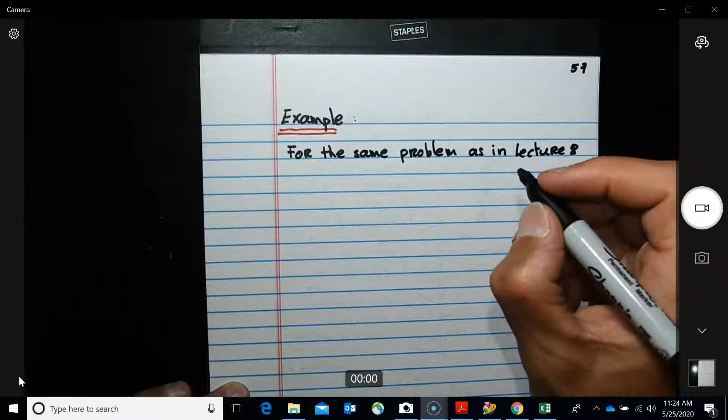So let's say for the same problem as in lecture 8, but assume the web/panel is only effective in shear.

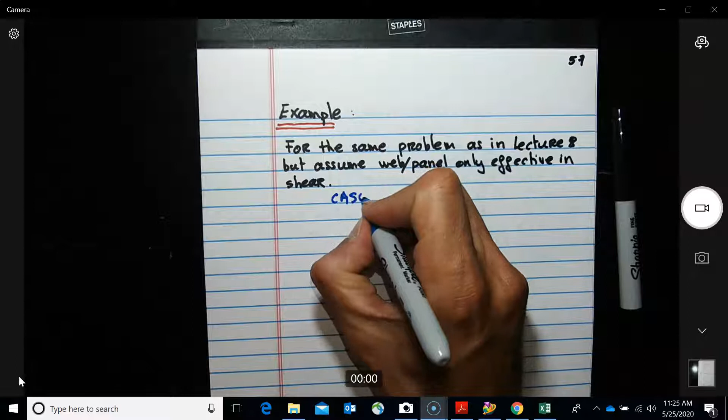Okay, so in this case we are dealing with case 1. Let me just do a very quick figure again.

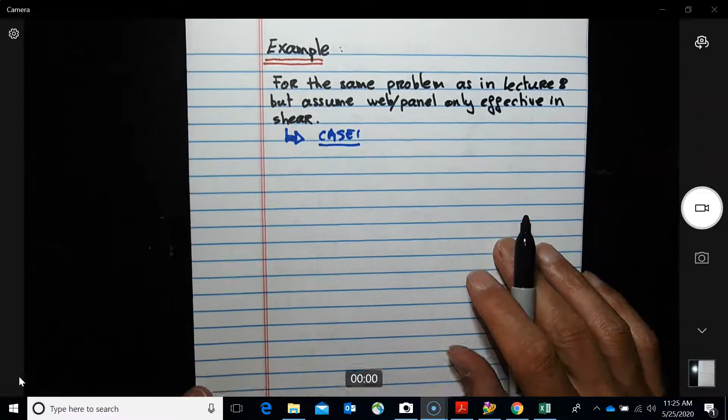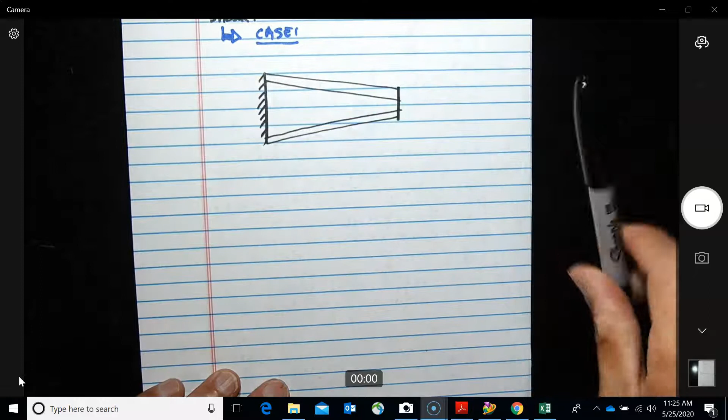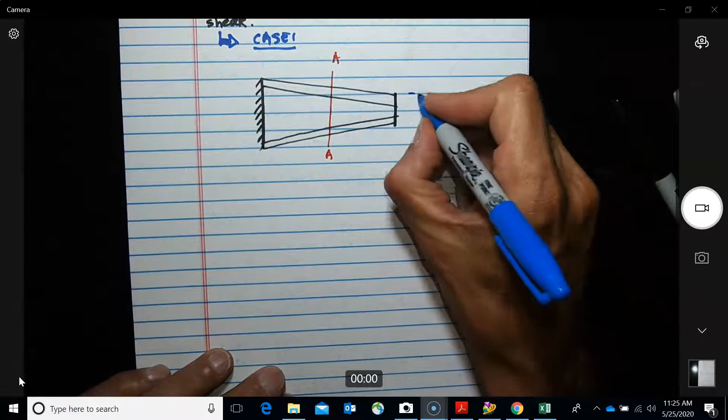So it's not too good, but let's say this was clamped. We're looking at the cut, which was right in the middle. That distance over here is 200 millimeters. This one over here is 400. And then this cut here was at 1000, and the overall length is

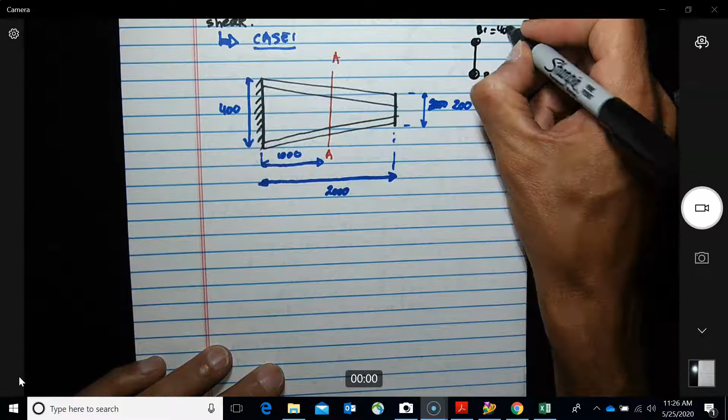2000 millimeters. Okay, now the areas of this, we had to do a boom, B1, B2, this was equal to 400 millimeters square, and the thickness here of the panel was equal to 2 millimeters.

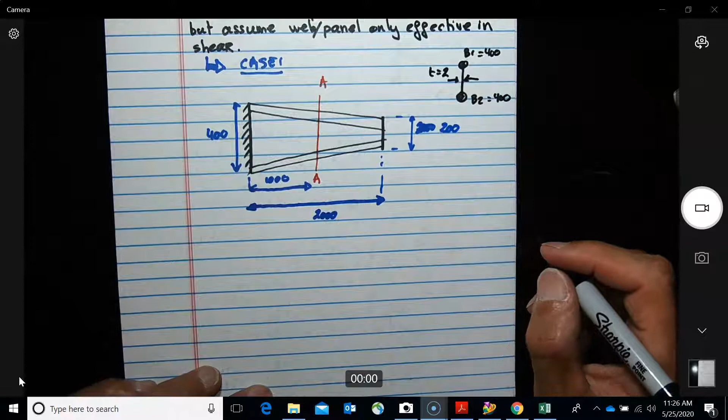Okay, all right, so basically what happens at the cut? Oh, I forgot to draw the force, and here we had a force of F equal 20 kilonewtons.

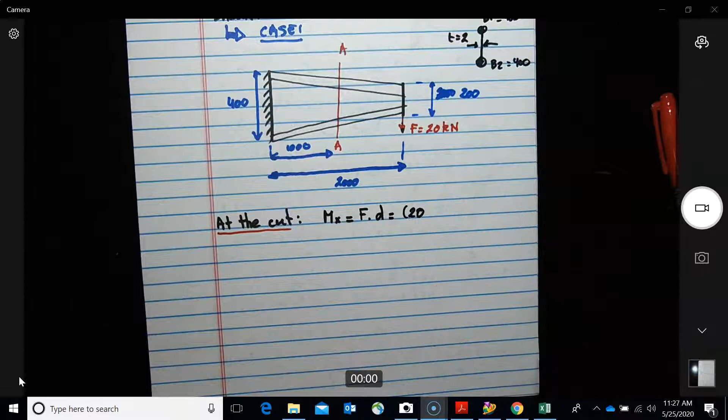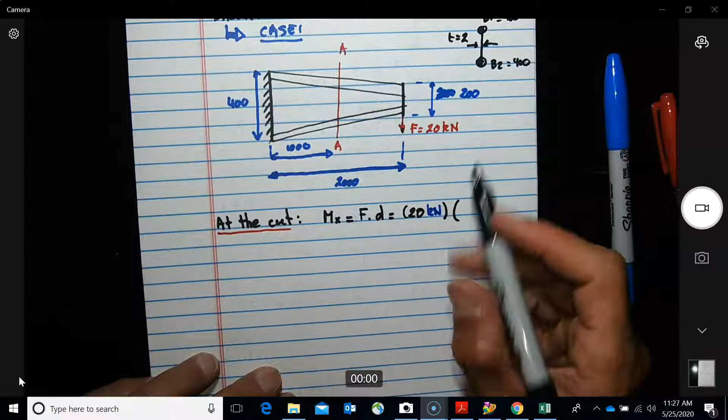Okay, so what would be the moment at the cut? So the moment at the cut, Mx, because of a reference frame, will be equal to what? Will be equal to the 20 kilonewtons times distance. So it will be 20 kilonewtons times that distance, that will be 1000 millimeters. This is going to give us that Mx will be equal to 20 times 10 to the 6 newton millimeters.

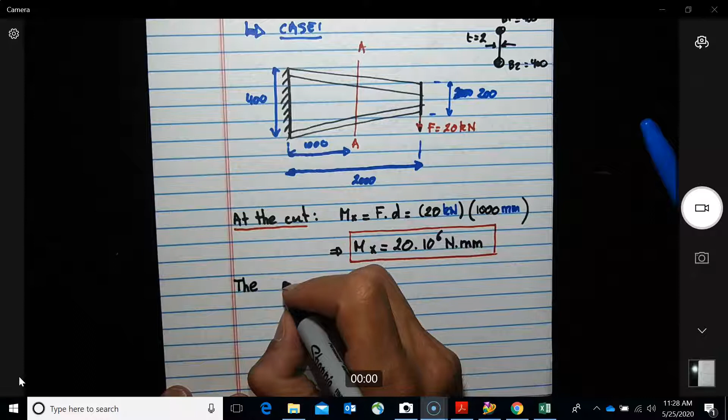All right. So by doing this, we know that the load, so we have that's 1, that's 2, so the load the flanges

is what? So remember, we're going to have two components. One would be the, we can do a little sketch for the top one. P1 will have one component, the Pz1 and the Py1.

So if we go to the notes, we know that Pz1 will just be equal to the moment divided by the depth at this location - this is 400, this is 200, the middle would be 300. So this will give us 20 times 10 to the 6 divided by 300, and then the one at the bottom will be Pz2 equal Mx over h equal to 20 times 10 to the 6 divided by 300.

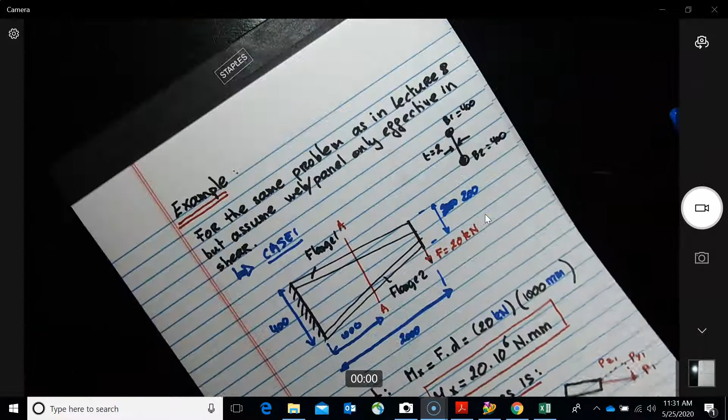All right. So now we need to find the vertical component of the load.

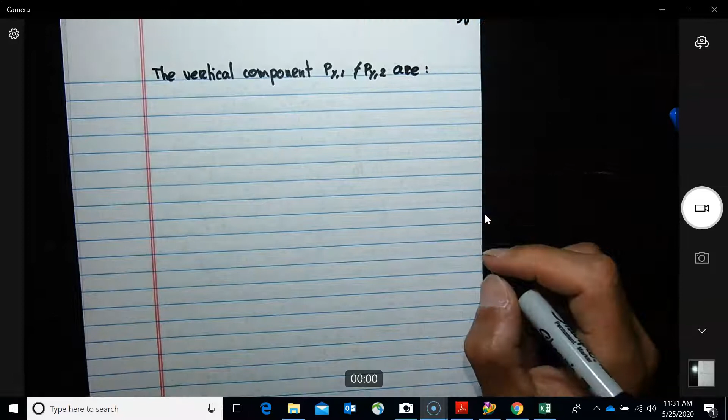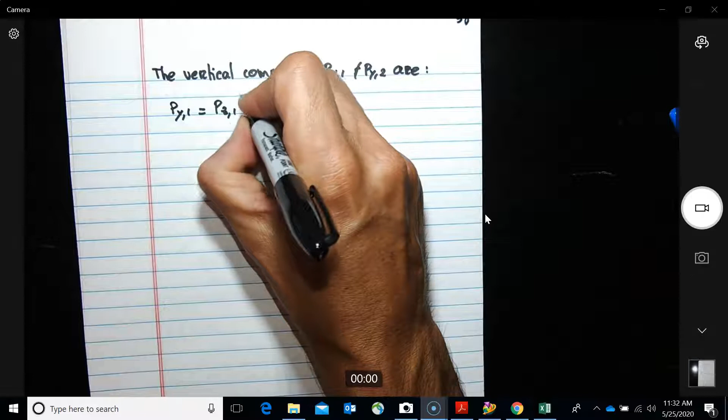Okay, so the vertical components Py1 and Py2 will be equal to what? So we'll have Py1 will be equal to Pz1 by definition tangent alpha 1, which we know it will be equal to Pz1 delta y1 over delta z. And Py2 will be equal to Pz2 tangent alpha 2, which will be Pz2 delta y2 over delta z.

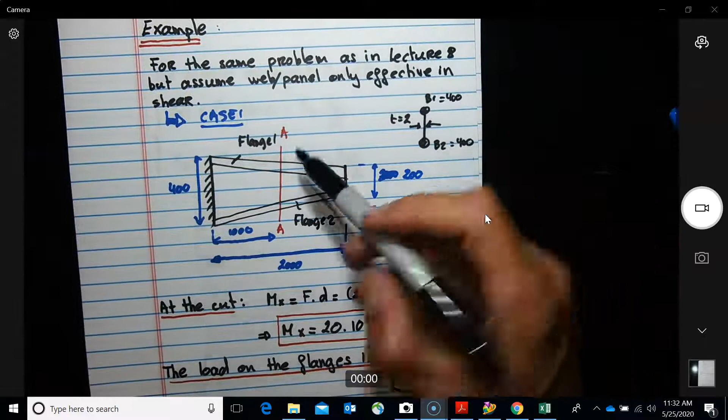Okay, you can look at the previous lecture, but basically what would be delta y? Delta y is the change in height. So between this point, let's say 400 to this one will be 300, will be 100. Or you want to look at it, this will be 200. So it will be 400 minus 300. So yeah, the overall change in length will be 400 minus 200, will be 200, sorry, half of it.

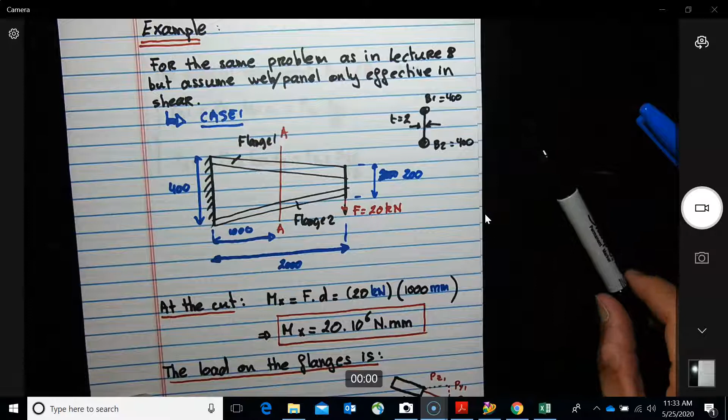Oh okay, no, I'm getting confused because I'm going - you can either do from here to here or from here to here. So if you go, let me go back to the notes, it would be easier. This I think is open here. Yeah, so this is the example.

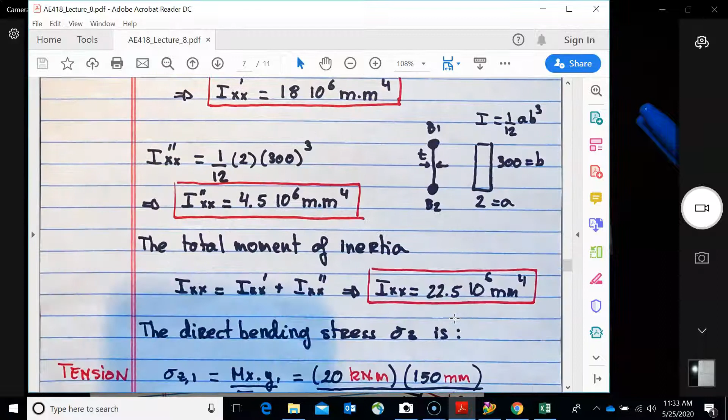So that's the difference. We did all these calculations, and then to find, let's say here, you can either go from here to here, that will be 200 minus 100 is change in height of 100, and you go from this point to this point, so it's divided by 2000. Or you can go from the change in height, let's say from here to here, or from here to here would be 200 minus 150, 50, or 150 minus 100 divided by that distance, or just that distance, which is 1000. And since it is symmetric, this one is the same, so it's 1 over 20. That way I don't have to repeat it over here.

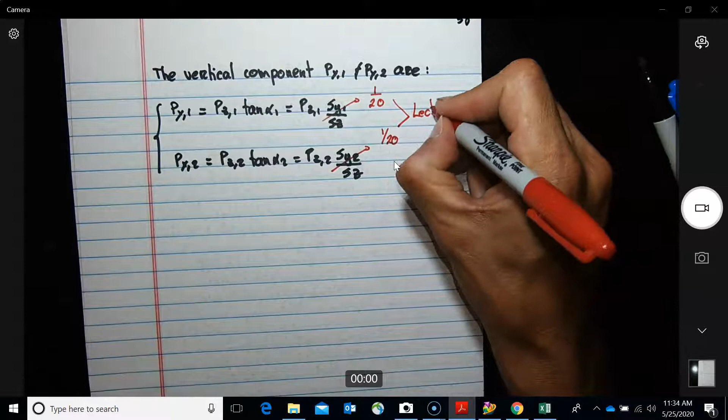So this one over here, we know this is 1 over 20, from lecture 8. All right, so now we can just go and simplify, and we're gonna get that Py1 equal to 66,666.67 times 1 over 20, and this gives 3,333.33 newtons.

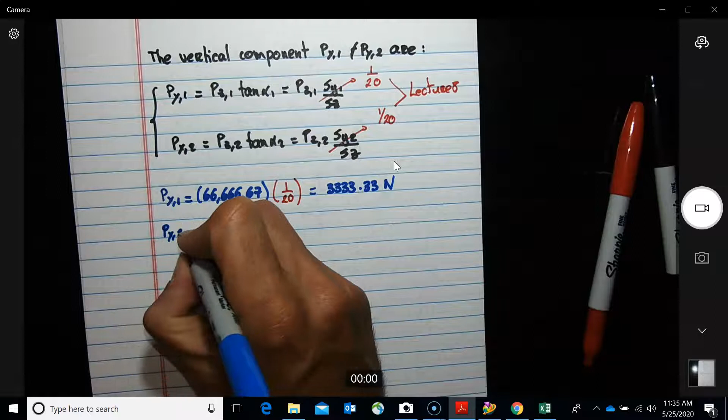And similarly, we're going to get that Py2 is equal to 66,666.67 times 1/20, equal to 3333.33 newtons.

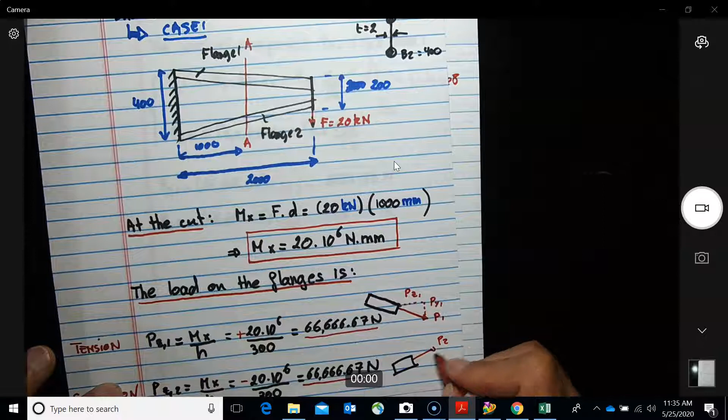Okay, so as before, remember that with that figure, this one is going down, and this one, the y, will be going up. Okay, so basically this is what we have. Py1, Py2. Okay, so this one goes down, this one goes up. It's the same figure as in the previous lecture.

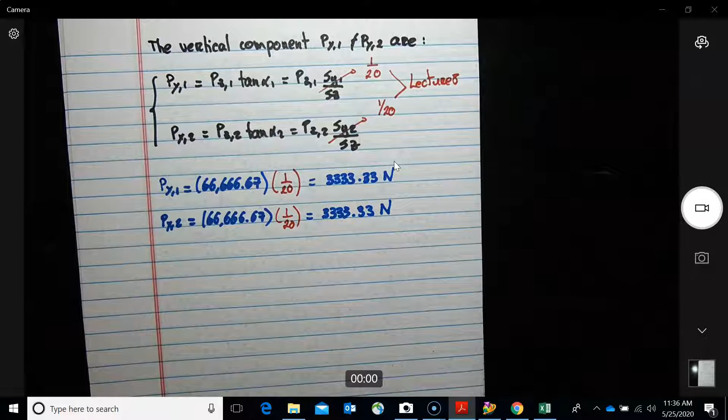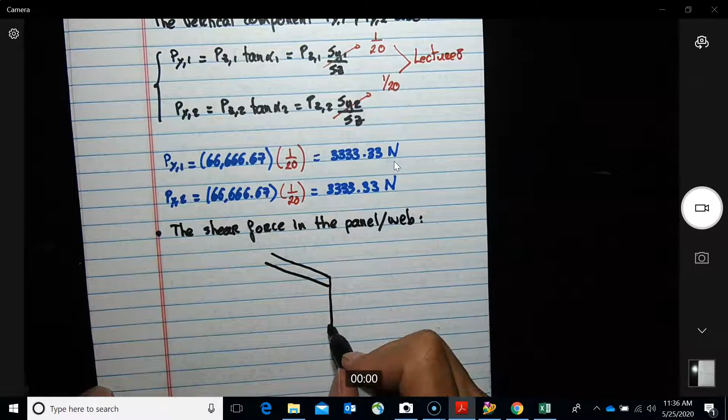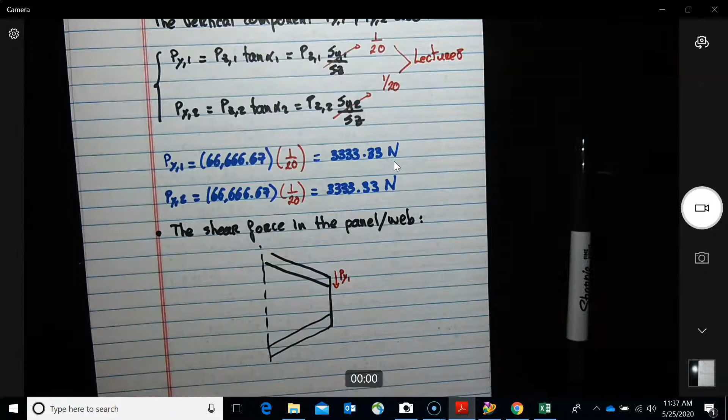So now if I do the figure here to find the shear force, so the shear force in the panel/web will be what? So do this. All right, so we say that Py1 is going down because the web is going down, like this figure over here, and now this one will be going up. Py2, now this one you can do whatever you want, up or down.

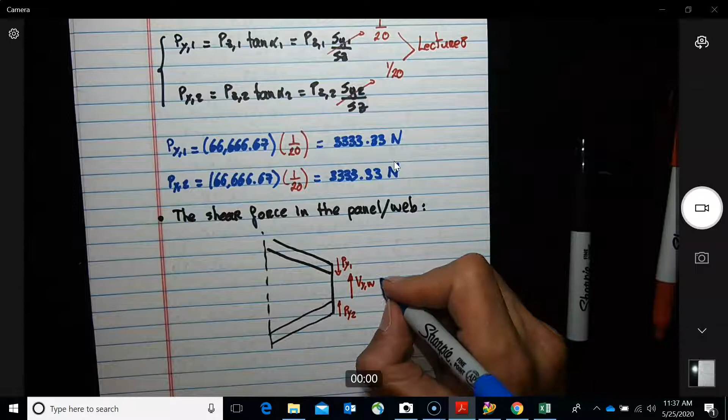This will be the V on the web, and let's say this should be equal to the total shear force or the force outside. So let's say if I plot it this way, okay, let's say this will be V, but this is external, okay? So external force, which really should be equal to the F force, which is equal to 20 kilonewtons going down.

So really here what we're doing, I told you these two methods. You can either do summation of force equal to 0, but personally I like to do more like summation external will be equal to the internal. I think it's more representative. So what happened? This is the external force, okay?

So this will give us what? V need to be resisted now by the structure. Okay, so on the structure, what do we have? Vy web minus Py1 plus Py2.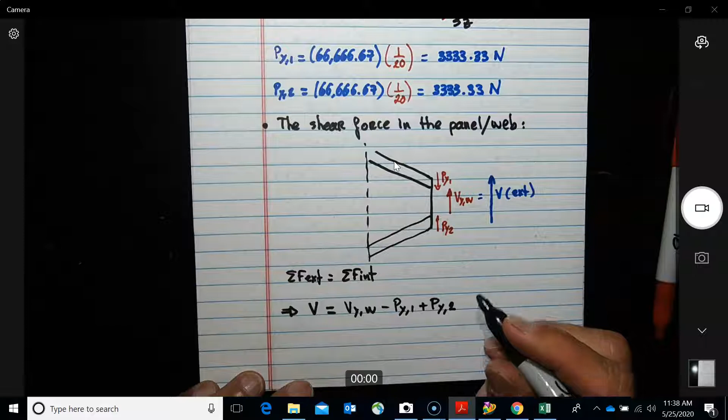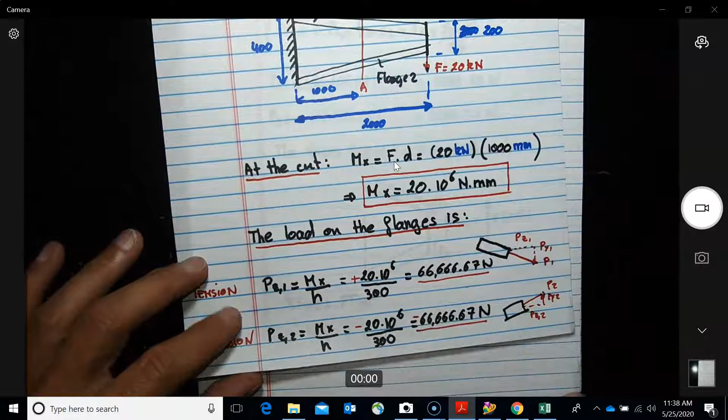And now over here, we need to be careful here because what do we say? Yeah, maybe here I put it wrong. Here is P2. The bottom, the top is in tension, the bottom is in compression, so this is negative over here. All right, we should give us a negative value over here, and it should be a negative value here.

So now what happened? So from here we can find that V shear force on the web will be equal to V plus Py1 minus Py2.

I mean, if you think about this, this makes sense, okay? The web is going to have to carry whatever load this is carrying minus whatever the two flanges are carrying, all right? So logically, we should get what?

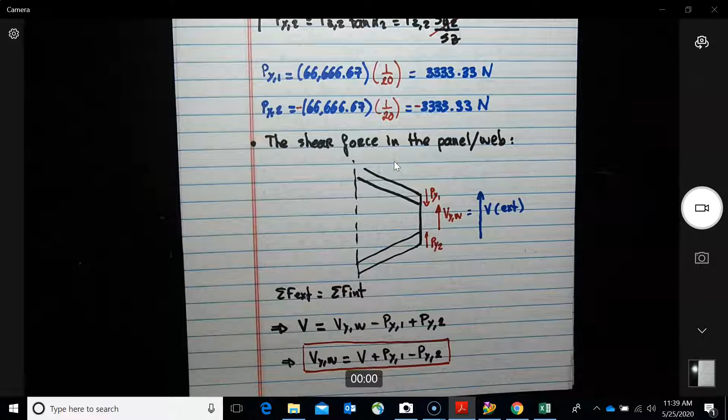The 20,000, the load 20,000 minus whatever each one of the flanges is carrying, okay? So it would be 20,000 minus the Py minus will be minus twice the 3,333.33. So let's see what the math is going to give us. So 59.

Where we say that V will be equal to minus 20,000 newtons. Okay, this is the 20 kilonewtons. Then we get that Py1 was equal to tension, so it's 3,333.3 newtons. Py2 was in compression, so it's the same thing but negative.

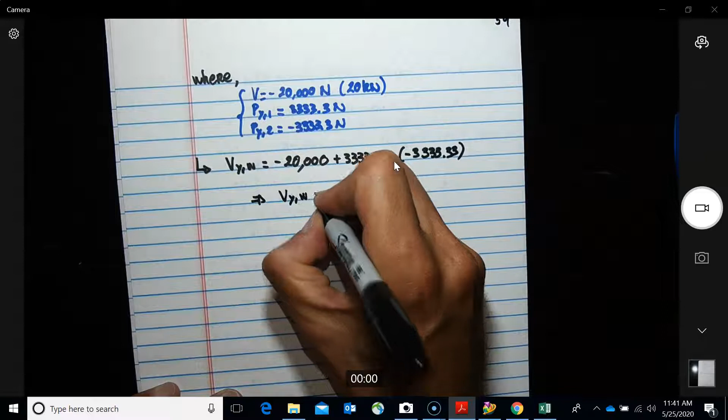Okay, so when you go and substitute into the equation, you get that Vy will be equal to minus 20,000 plus 3,333.3 minus 3,333.3, okay. So this will give us Vy web equal to minus 13,333.34 newtons.

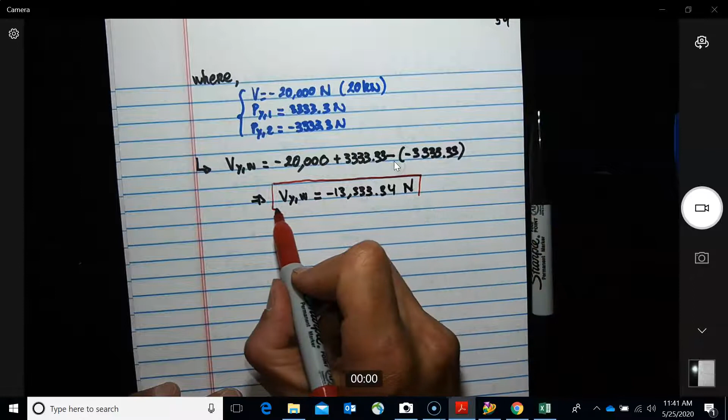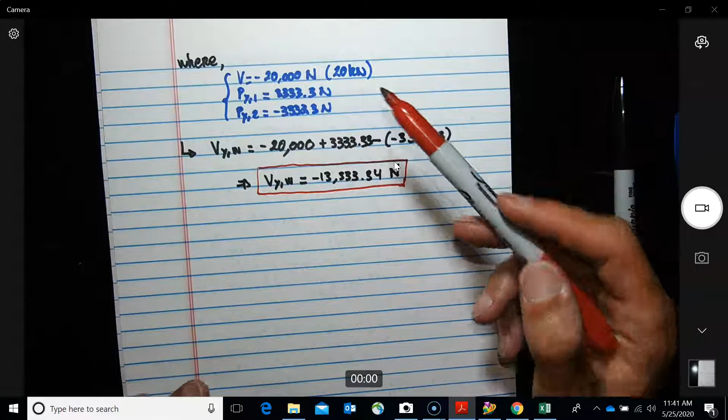Okay, so basically this is the total load, external load, minus what each one of the flanges will carry in the y direction. Okay? So now for case 1, we know the shear flow in the web is constant. So for case 1, we know that the shear flow in the panel/web is constant through the depth of the spar or wing.

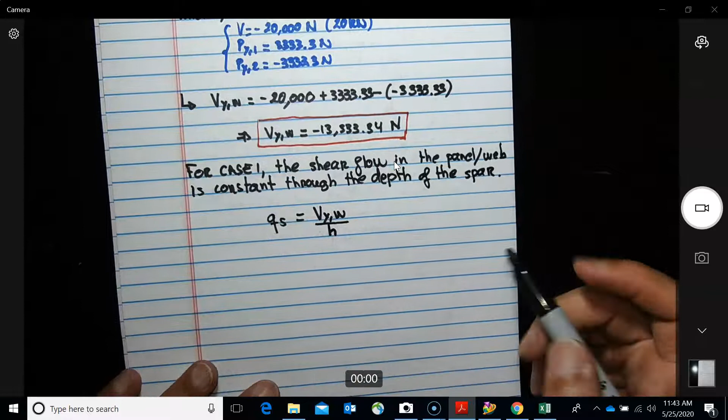Okay, so we know QS over here will be equal to Vy web over H. Okay, so positive, negative, doesn't matter, depending on the sign convention you take for the shear, but it's not that important.

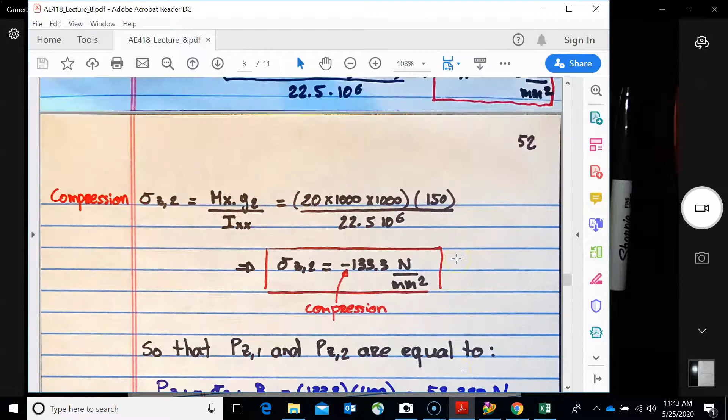Okay, let me go back for a second here to lecture 8. Let's see, we have something. For case 1, this is a problem. Okay, so this is the constant throughout the spar. All right.

So then the local application will give us that QS will be equal to 13,333.34 divided by the depth of the spar, which is 300, and this is going to give, we're going to put the minus 44.45 newtons per millimeters.

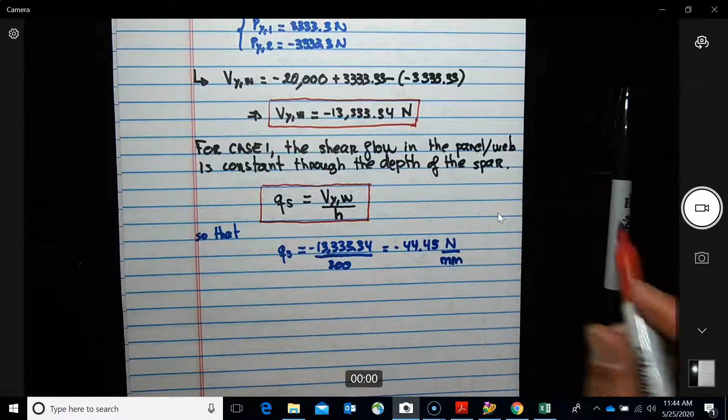Okay, so we know over here is constant, so that means that if this is B1 and this one is B2 at the section AA, we know that the thickness here was 2 millimeters, so this one should be constant over here. Really the value, the sign doesn't matter, what's important is the value. And this value here would be 44.45 newtons per millimeter.

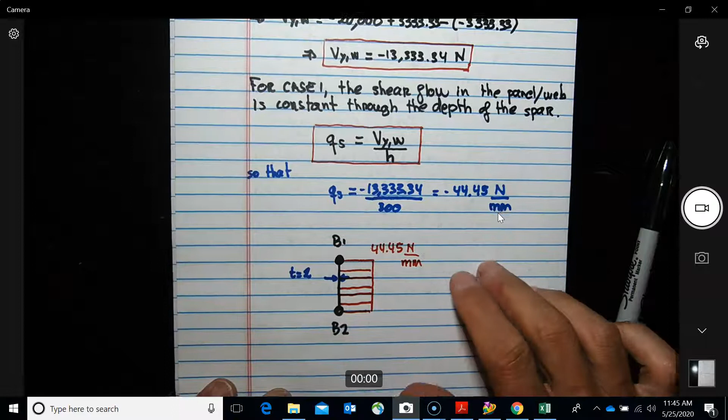Okay, so what's important over here to notice is that, let me maybe go to the next page.

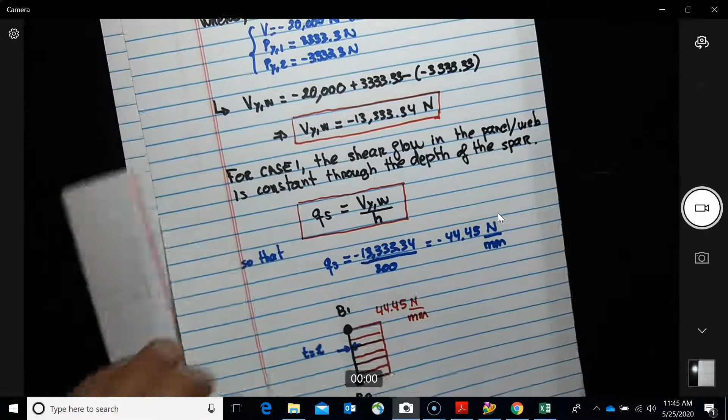All right, let's do a summary. So what is the summary for the example we just did, which is case 1? What did we find? We found that Q is constant and equal to 44.45. Just want to look at the magnitude.

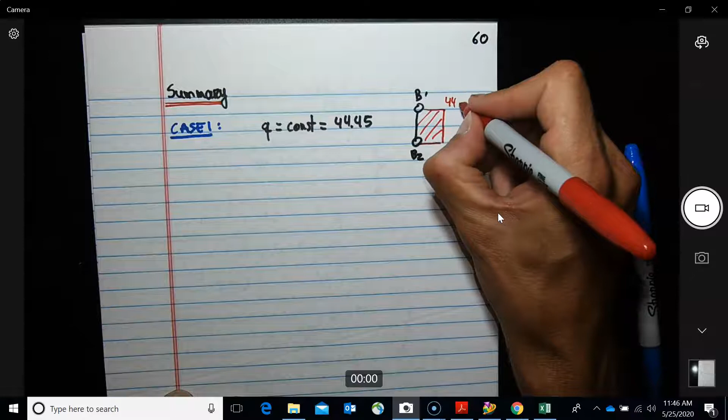So if you do the distribution, B1, B2, we have this over here, 44.45, and the distance here is 300, the depth. This is really H.

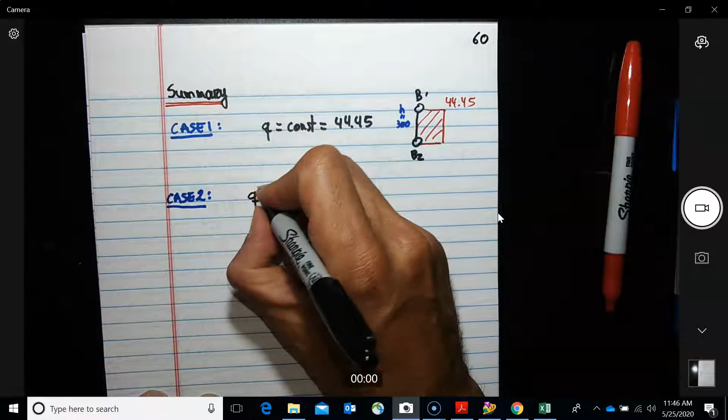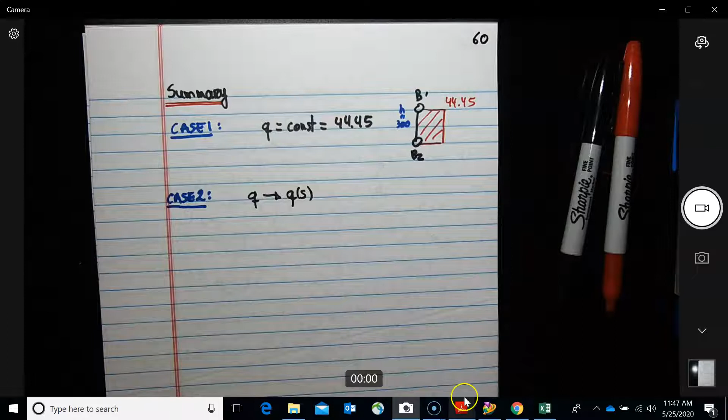In case 2, which now we said the web is also effective in bending, we had a complicated expression, so Q was in function of S. Let's see if I can go back to that page. All right, so let's wait. So this is the equation.

So we had, you see, QS now for case 2 will be in function of S. And in the problem we did, we found that expression for QS was equal to this expression here. And that gives you a distribution, you see that it's not constant.

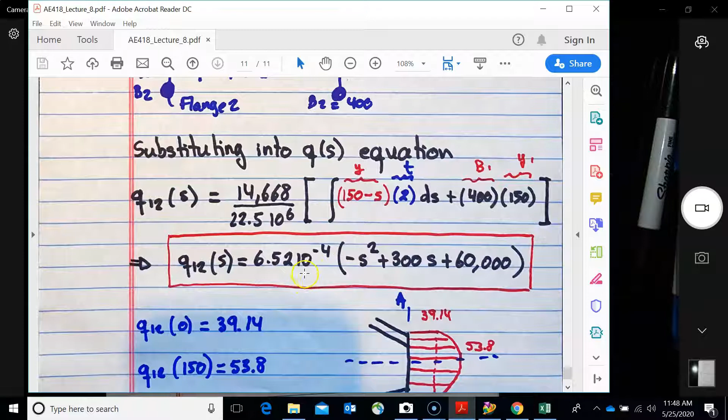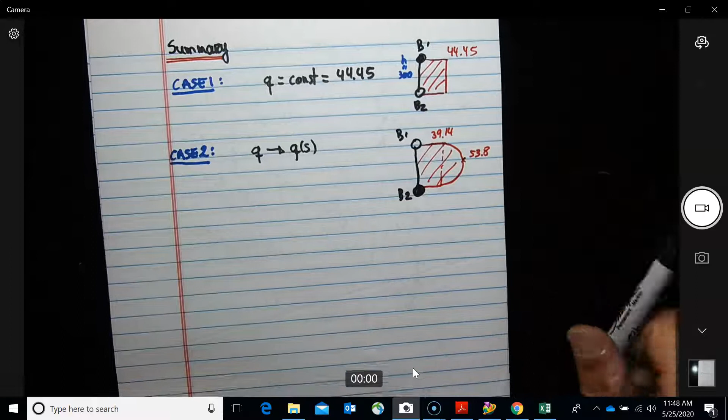All right, so the distribution is 39.14, and the max value is 53.8. All right, I just redid the figure here. So what's important to see is that if you do the analysis using case 1, you get a maximum value of 44.45.

But if you do it with case 2, you get a maximum value of 53.8. So what happens is that this one will give you some type of average value. If you calculate the area of 44.45 times 300, it's probably pretty close to the area as if you do 39.14 times 300 plus the area of the semicircle. So this one will give you a correct value in the average sense of what is happening in the structure, but this one will give you a more realistic distribution of the load, giving you the highest value.

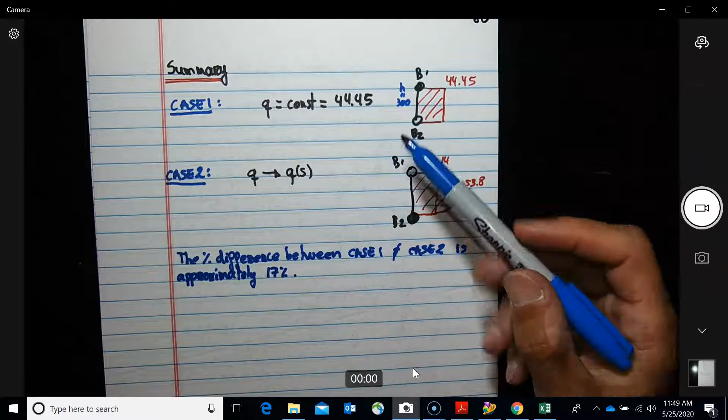So the percentage difference between case 1 and case 2 is approximately 17%. So you see that whatever assumption you make in solving your problem, you can end up with a considerable difference in value.

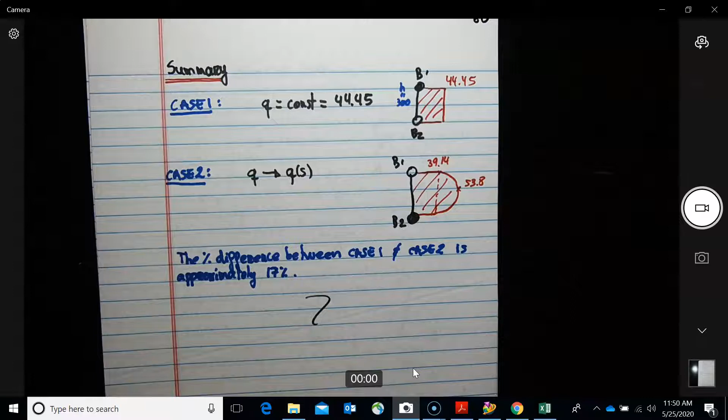All right, so on the same video now, I'm going to use the same file we had before in Nastran, but now I'm going to do it for case 1, very quick. All right, so this is what we have.

59, 57, 58, 59, and 60. Okay, so let me get organized. Now let us do the finite element analysis for case 1. Do you remember before we did save the geometry? So I'm going to reuse it. Same process, first thing to do is to create the material.

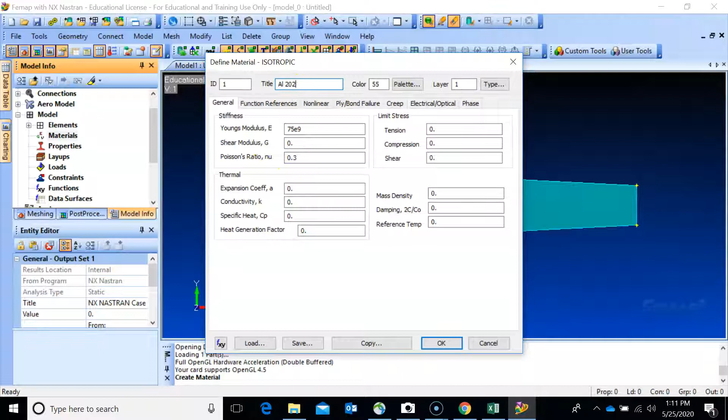Really, you could put any value here, but I like to use a real material, which will be aluminum 2024 T6. Cancel. Now we need to define 2 different properties. So let's look at the shear panel. One, don't forget to do this over here, otherwise it will give you some error.

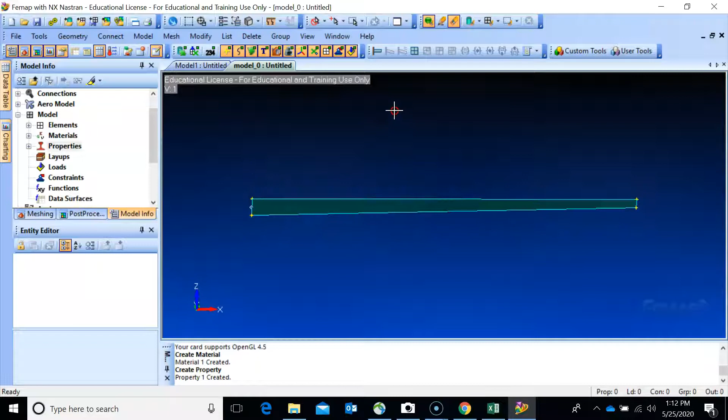And then here, be careful. I know the problem said that the thickness is 2, but thickness is 2 on the Z direction. And here we're looking at the shear on the Y direction. So be careful, just put 1 over here. Basically, if you put 2, you will need to put 2 in this direction, not on the depth direction. If you put 2, you're going to end up with the value of the shear throughout the cross section of the plate, not throughout the cross section of the Wing-Spar. So basically, if you are here, you will be calculating in this direction here. Okay, so F8 XY.

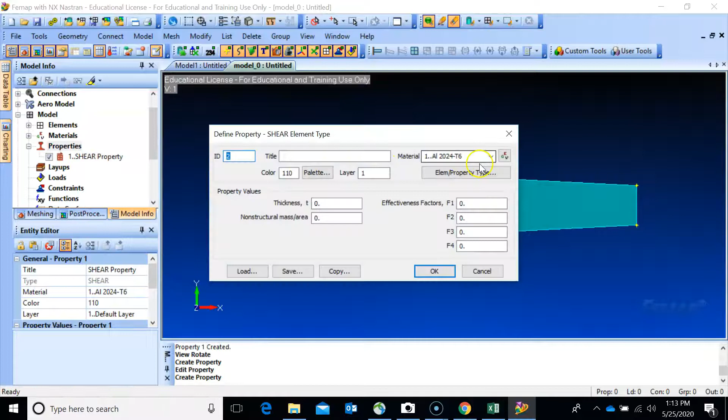All right, so the other property we need to create is the one of the rod. Oops, so what did I do here? Let me see what happened with this property. No, that's correct. So property new, rod, and we know this one was 400.

Okay, cancel. Mesh control, size on surface, we set to use 100. Cancel, mesh geometry surface. Shear property, all right. Mesh geometry curves, 1, 2, 3, 4, okay, with the rod property. There we go. Tools.

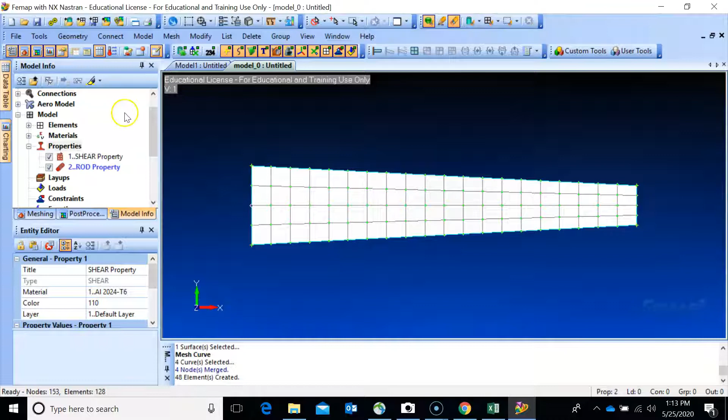Check coincident nodes. Select all. All the nodes on the boundary should be okay. Redundant, so done. Review, okay.

All right, so model constraint, let's say on curve, clamp, okay, fix, okay.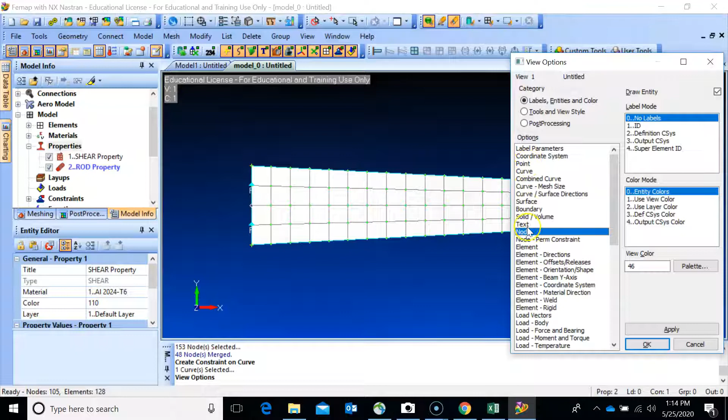I don't think we change the result, but if you want, we can put the load in just one node over here. Before doing that, maybe go here to F6, node ID, apply, okay. Let's see what is the maximum number of nodes.

Looks like it's 105. So if we create one extra node, it should be 106. Let's see what would happen. Custom, mesh spider, method on curve, so that one. You see it created here 106, which is on top of 23, I think.

Okay, so model load, nodal. This is the force, which is equal to 20 kilonewtons. Okay, node 106, so we have it here. Let's just leave it as it is.

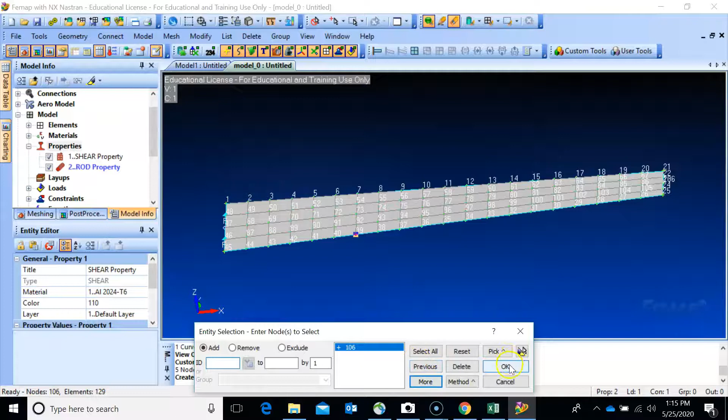More, okay. Minus 20, 1, 2, 3, because it's kilonewtons. Okay.

Basically, what this is doing is that instead of applying just the load at this node, it will be pulling from all these nodes at the same time.

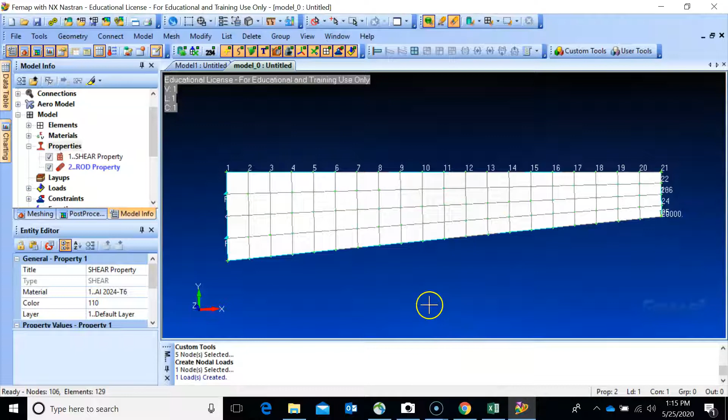Okay, so F8, XY, okay. So I think that's it now. Let's see. Okay, okay.

So is it already an analysis here? No. Analyze, manage, new. Okay. Analyze.

All right, so again we need to look at the section at 1000. So tools, work plane, so we can see where the 1 meter is. Group, new.

Section A. What did I do here? Section AA at 1000 millimeters.

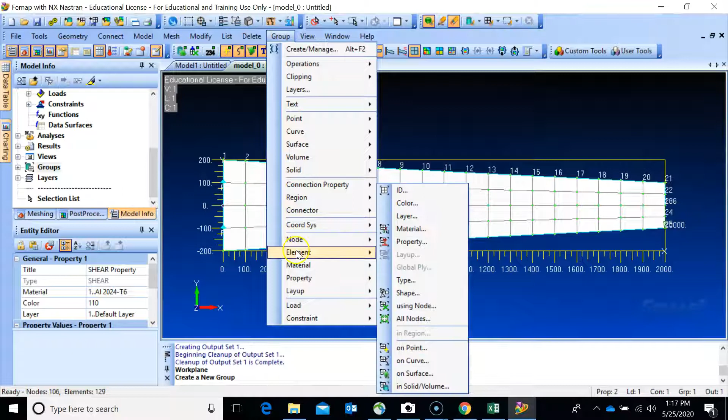Group elements ID, and we just want the shear. I mean, we could look also at the actual load if you want, we can do that later. Okay.

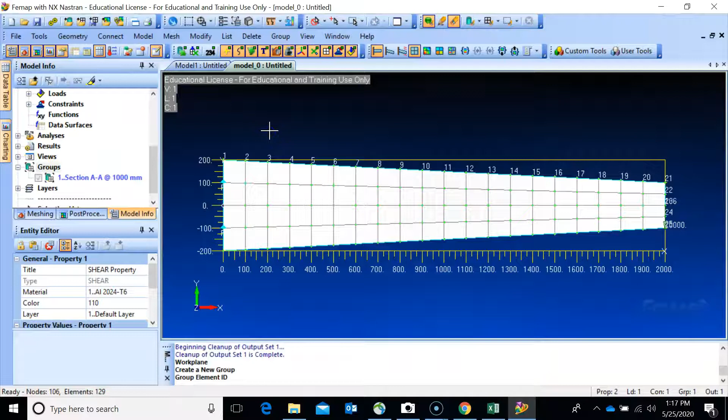All right, so now F5. Got contour first, deform, shear panel average. Okay, okay.

All right, maybe to do F6, no labels, apply, okay. So you see distribution, instead of just having a red over here, is more uniform. And let's do F5.

Criteria, okay. So let's go here on groups, active group, show active group, and we have this one.

You see that is constant between 43 and 46, and let me go back to the notes.

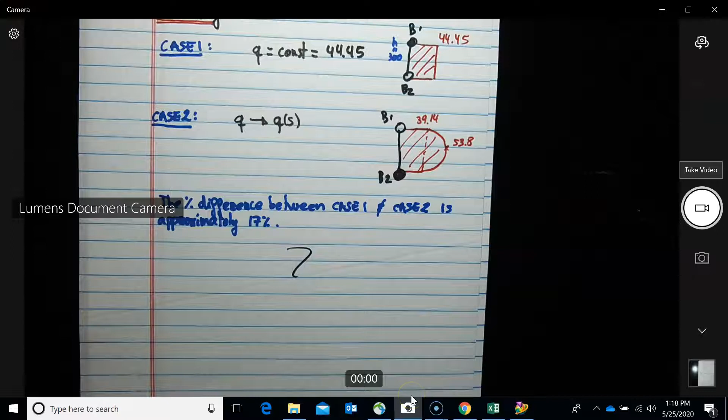And before we had for that one. All right, so let's see, can do this. We had a value, you see, of 44.45, which basically is about the average of these two, okay? And you see the value will be constant throughout the cross section. All right, something we did not calculate, but if you want, we could do it, okay?

So let's say now show for group, and let's try to create another group. Let's see what would be the actual load on these flanges, okay? So let's see what can we do with this.

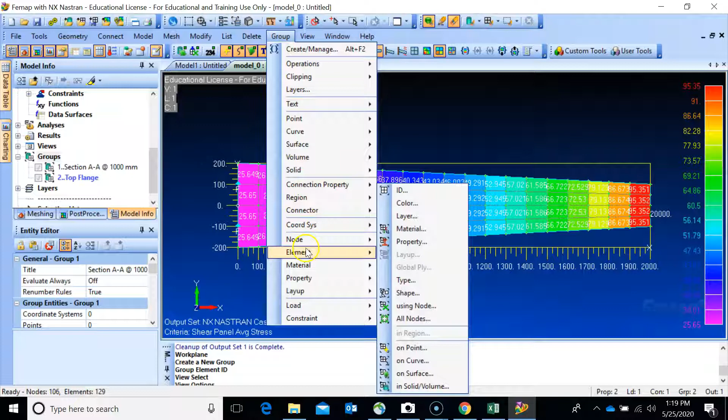Group, new, let's call it top flange, that we know should be in tension. Okay, so it should go here from a value to all the way here to 0, top flange group, elements on curve.

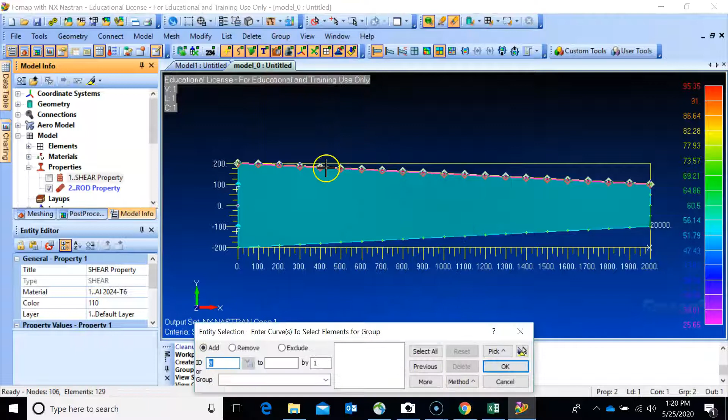Alright, let me do one thing here. I don't know if it will help or not, but we don't want to take the shear, so group, elements on curve, so hopefully if they are not active, they're not going to be considered.

So show active group, it should show nothing, okay? Because these properties mean this contour is for the shear panel property, and for the rods is this one. So rod axial stress, rod axial force will be the same thing.

Okay, and here probably the best thing is to do a beam diagram. Okay, so you see it goes from a value over here, which is about 98,000, so probably it's a bit high, it's probably 100,000, to basically here to 0, okay?

And this will be like we did before in order to calculate it. So this one is in tension, and I will do the lower one, it should be the same values but negative in compression.

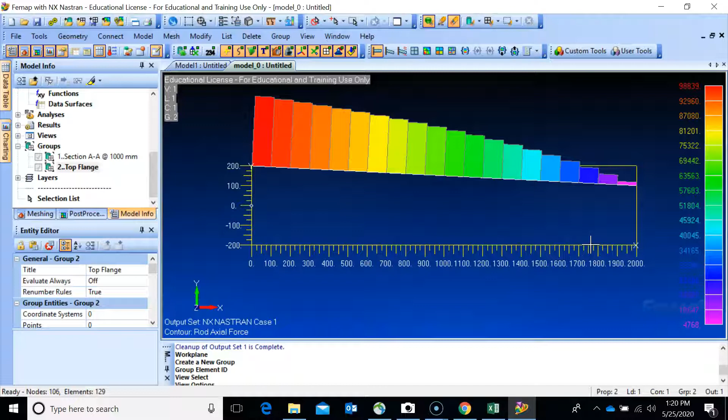Alright, so I think this will finish this short video, okay? But again, let's go back to this one.

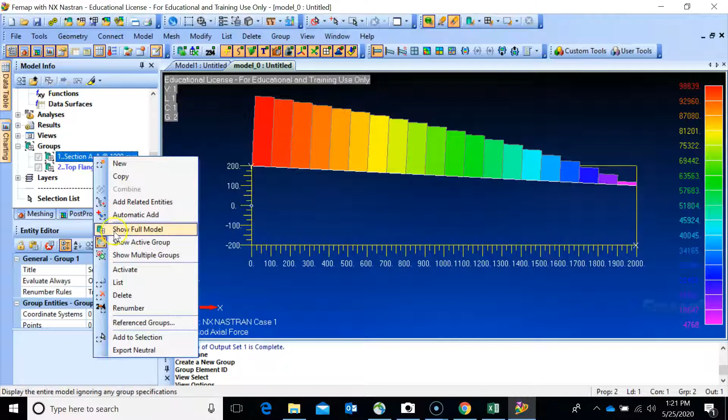Show active group. That one should show nothing, so F5 again here. Criteria, form, I think it was 6020, yeah. There we go.

Let's eliminate the work plane. So you see over here it's constant.

Okay, and if we open the previous model that we had, let me save this one first. File, save as, model 1.

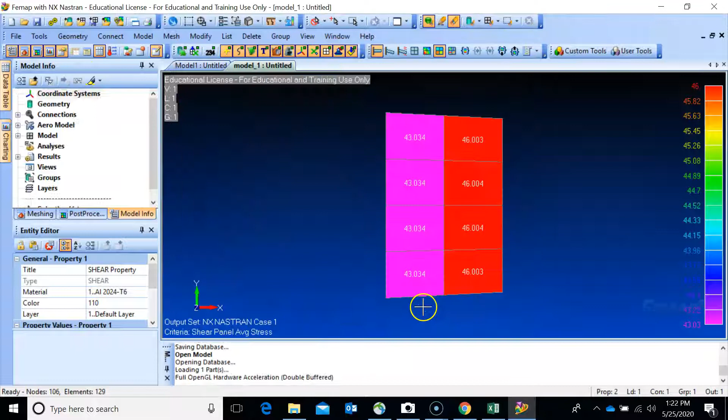So you see it's constant, constant, constant, constant, but this one is more like this way. All right, so that would be the end of the video.